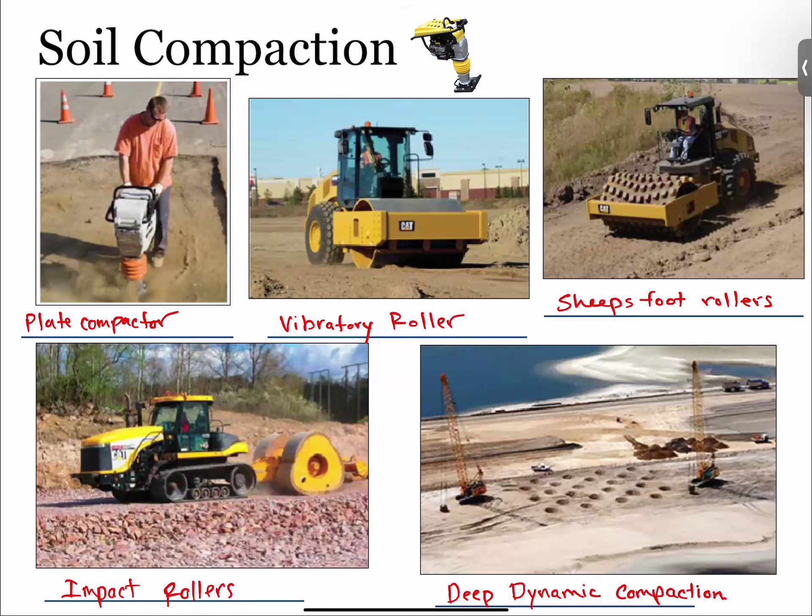So with the different types of soil, like gravel, sand, silt, clay, and domestic waste, all of these types of conditions are going to have different applications. So, for example, the static sheep's foot roller. Has anyone seen these before? Okay, we don't really see them too often in Florida. They're mainly used for clay. So they're going to be very good in clay soils. So if you drive up in Georgia, the DOTs up there are going to be running

these sheep's foot rollers. And the reason why is because, as we talked about with clay, with the SPT, clays are sensitive, like little structures of soil, right? And if we take a hammer and hit it, then it's going to just disperse it everywhere. So this sheep's foot roller kind of kneads the clay into densifying it, instead of having a smooth cylinder where the clay might stick to it, or an impact where it's just going to smush it around. So these are very good for clay.

This is also used a lot in domestic waste just because of the variability of material, like for landfills and different types of applications like that, as well as for silty soils. But it'd be kind of poor for gravel and sand.

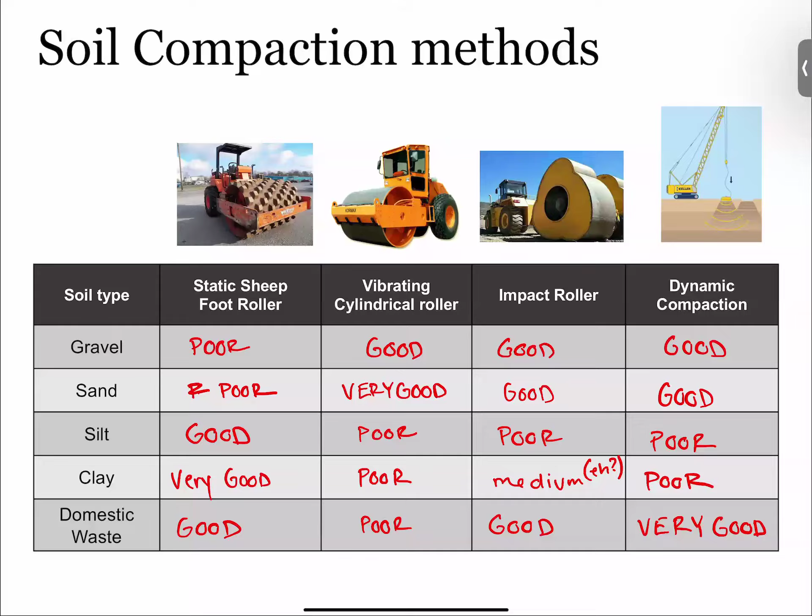So this is a really interesting technique that if you ever get a chance in your career to actually go and work on in person, it's really fun just to go to a job site to see them lift this 12-ton or 10-ton mass into the air and then drop it strategically, especially if they have multiple cranes going at once. But this is used on a lot of large-scale geotechnical problems where you need ground improvement to a certain depth. So mine tailings, any loose ground, old riverbeds that they're trying to develop on, and some dam work. And there are only a few specialty contractors, like Menard or Keller Group, that can usually do these deep dynamic compactions.

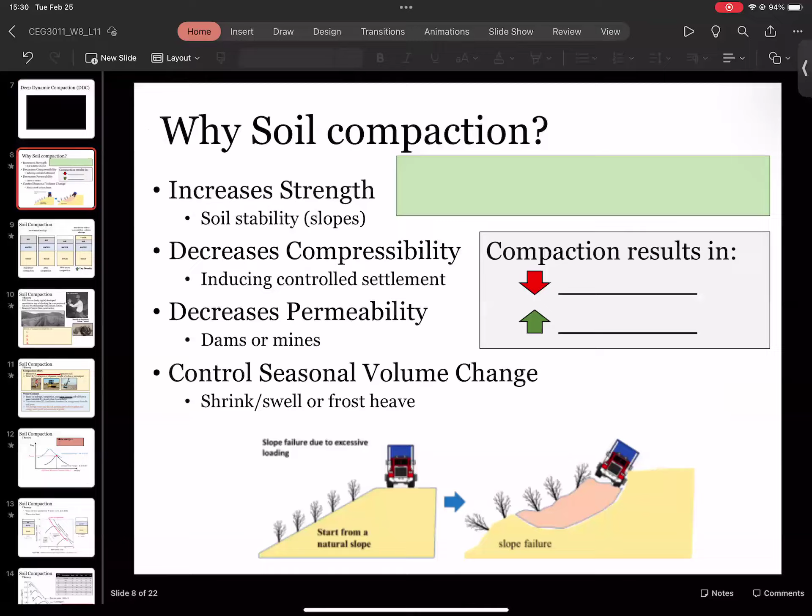It was working. As soon as I hit X, it'll probably load up again. Yeah, okay. Let's see if we can just play from here. Well, maybe this video is not going to work. All right, just close your eyes and imagine a sweet drone footage of going through a beautiful sunset and a bunch of weights falling and hitting the ground. That's it. I'll post the video.

It's not too crazy, but it talks about the whole process of deep dynamic compaction and some of its applications. So why do we compact soil? Overall, it increases the strength of our soil. What we'll learn, and the general theme of geotechnical engineering, is that granular soil will increase in strength as we increase density. As we add more material to our little cube, there's more frictional resistance and more particles locking together, which will increase the strength.

So this is really important for slope failure. We would compact very strategically on embankments like this, to ensure against shear failure on slopes.

It also will decrease compressibility, or essentially it accelerates any potential settlement by causing the settlement to occur on its own. There are a lot of cases where, if we know an issue will be an issue at the site in like 5 or 6 years or 10 years, they would induce that settlement ahead of time, before the project is complete and before it's connected to all the surrounding infrastructure, and compaction is a way of doing that. This will also decrease permeability. Just as a recap, permeability is the ease of water to flow through the pore space.

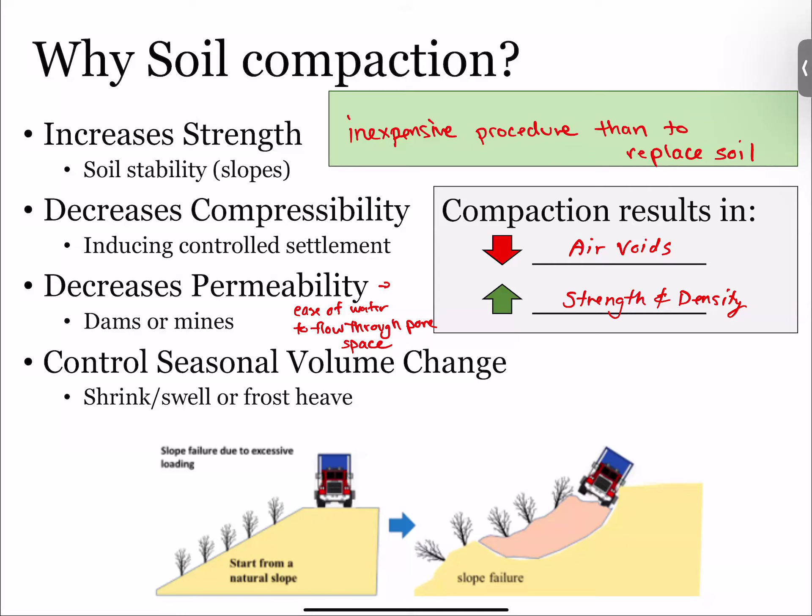So the general thing of soil compaction, what is happening? We have our beautiful phase diagrams. You remember that from a few weeks ago. We have solid, water, and air portions. We can only compact non-saturated soil, so we have to have air in it. If we compact saturated soil, then nothing is happening. We can't densify past 100% saturated soil. If you remember, there's that zero air void curve, that maximum density. So if we're already at saturated conditions, we can't compact any further. So this is for non-saturated soil.

But what we do is we remove the air voids by compacting it, or by rearranging the solid portion such that some of the air voids are removed. So we're removing the total volume. With each pass of more compaction, we're essentially removing the air voids, and then we replace those air voids with more solid material. That's why when you see the sheep's foot rollers or vibratory rollers at the job site, you'll usually see a dump truck nearby with soil fill, and a backhoe or a grader to come in, because you'll compact it and then put more soil in to meet that grade line.

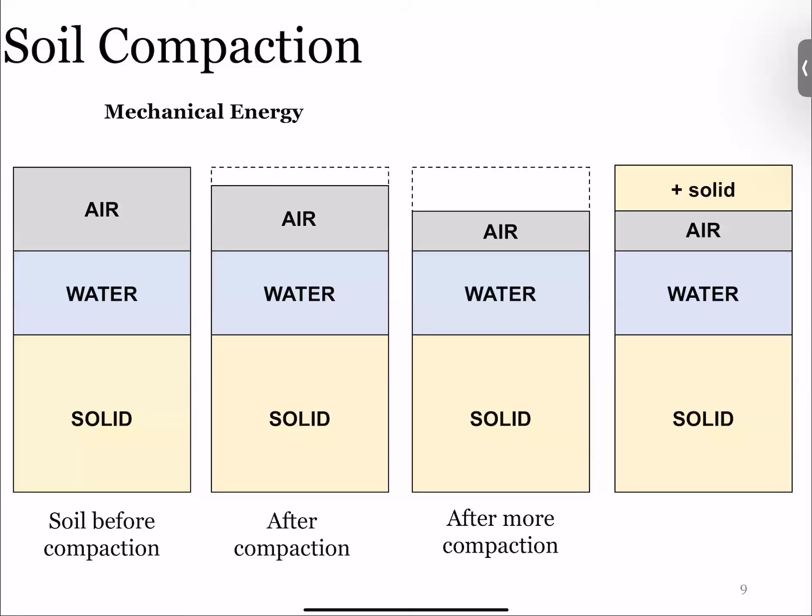You have a question? Can you compact something without using a compactor, by just using water? Wouldn't the water push out the air, and then it would evaporate and just get replaced by air? Isn't there a method where they just pile dirt on, like make huge mounds of dirt? Yeah, surcharging, that's a way of compacting clay that we'll talk about.

I've never seen it just like jetting water, if that's what you're talking about, or using static, like the dead weight of water to compact it. I don't know. I've never seen either case. I wouldn't think so, because the whole goal is to remove air.

So adding more water won't work, but you'll remove air, but you won't be removing the total volume. You know, removing the air will lower the total volume, which you can then replace with more solid material. If that makes sense. I don't know. I'll look into that. If I find something, I'll let you know. Maybe like a pressure washer.

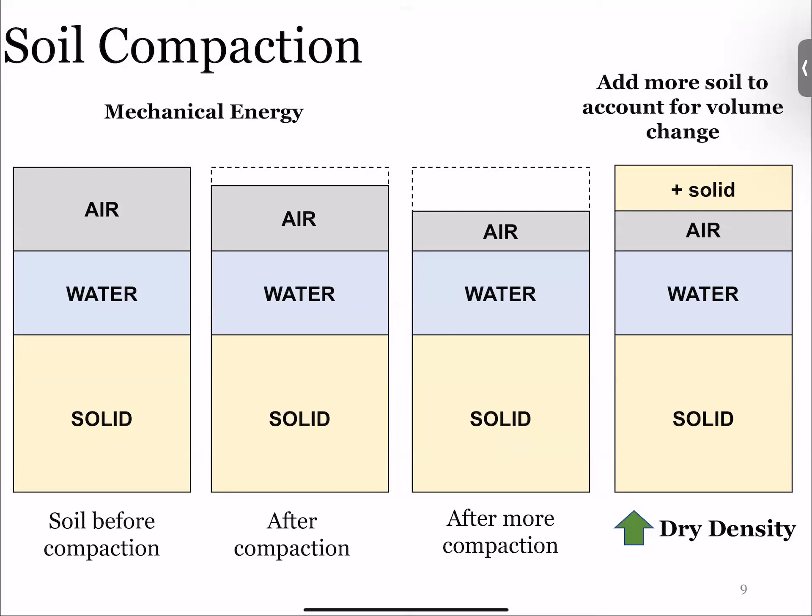So anyways, that's how this increases here. We're increasing our dry density, we're increasing our mass for the set volume. The whole soil compaction theory is kind of interesting if anyone's interested in the history side of it. It really spawned out of the 1920s, 30s in California, when they started having to build all these really large earth dams and reservoirs for the drinking system in the agricultural areas, right on the other side of the Sierra Nevada areas.

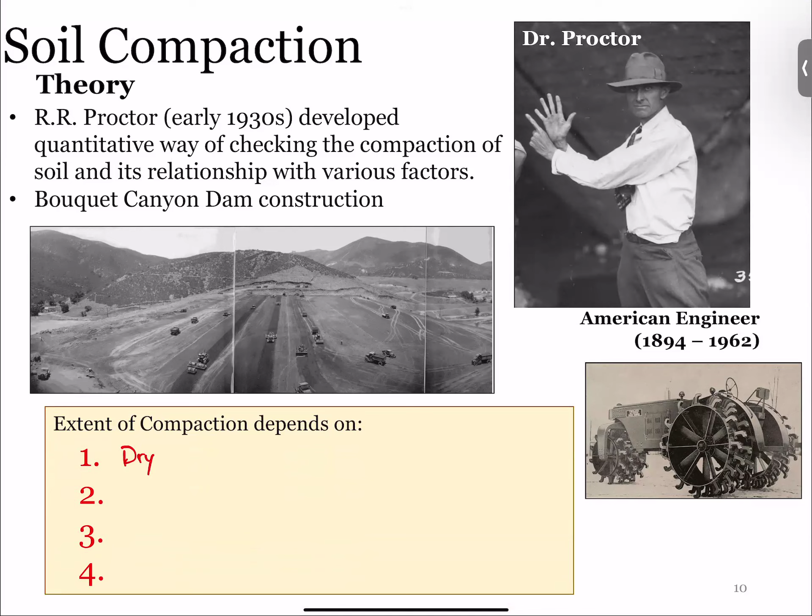It was first applied for the Bouquet Canyon Dam, which I think is still out there in central California. But essentially he realized that the extent of compaction can depend on four things. So it depends on the dry unit weight, which is our gamma dry. It depends on the energy, or the compaction effort is what it's called.

So this would be like the type of machine that we are able to apply to it, how much energy we can physically apply to it. It depends on the soil type and the gradation. And then of course, the big thing is the water content. Now, did you guys do the Proctor hammer test in CE materials?

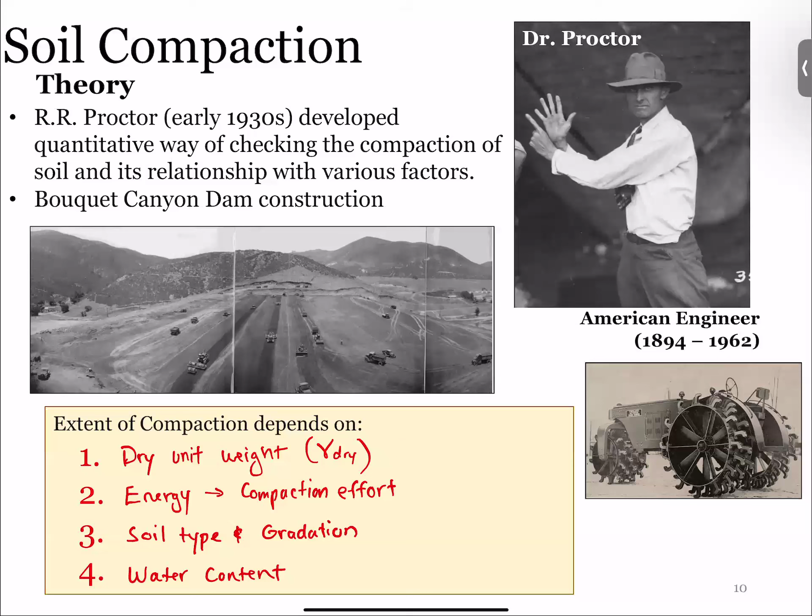Okay, yeah. So this is where he was named after, or it was named after this Proctor hammer. And that's what you guys should have been able to see out of that lab: we look at the dry unit weight relationship with the moisture content, but then also how that relationship changes with the energy applied and changes with the soil type or the gradation type. So the whole theory is that we can apply this compaction effort, which is the measure of mechanical energy. And it's something that we can calculate in terms of joules or whatever we measure energy in.

And the benefit of that, as you remember back from the lab, is we can apply this same energy to our soil in the lab as we are applying in the field, because we normalize it by the volume we're applying. So in the field, this is a function of the number of layers, the number of passes, the weight of the roller, or the technique. There are all these handbooks and guidelines that Caterpillar will produce, or whoever's doing the deep dynamic compaction, where you can get a quantifiable number of how we can change the amount of energy in the field applied to our soil.

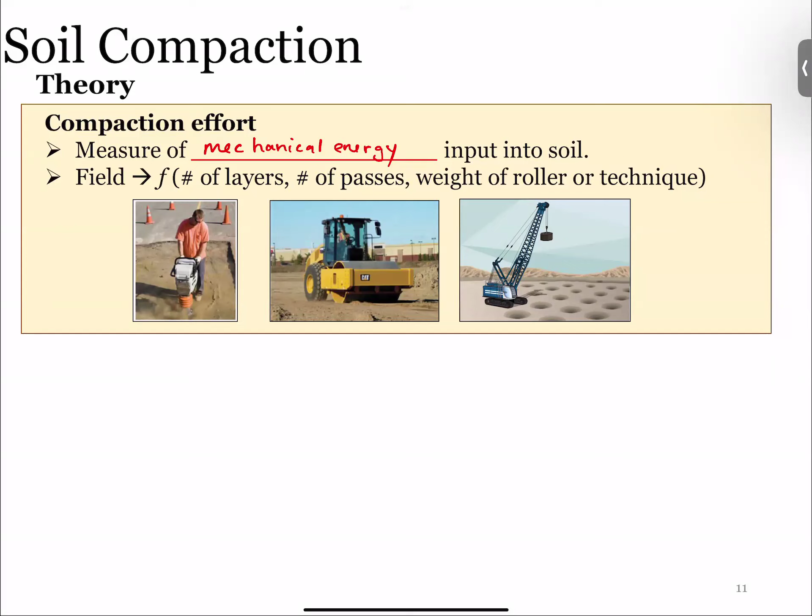And for the water content side of things, this is where the soil type comes into play a lot, because how the soil retains water is going to be dependent on the grain type. So we already talked about how clay retains water more than gravel does and more than sand does. So with the water content, you have this sweet spot or Goldilocks zone, where if we have too much water in our soil, then the water is going to transfer the energy away from the soil grain. That's the whole thing I was saying before, where water has a Poisson's ratio of 0.5, which means no volume change. So think of a water balloon that's tied.

You push it on one side, it's just going to expand in the other direction, right? So even though you see deformation, there's no total volume change. You're not losing any volume. So if that's the case, then when you apply this energy, it's just going to shove all the other sand particles or gravel particles out of the way. It's not going to rearrange them into a denser structure that will then increase the density. Now, if we don't have enough water, then the friction will actually overcome and it'll be difficult to apply energy, and it won't result in the movement of the actual grains.

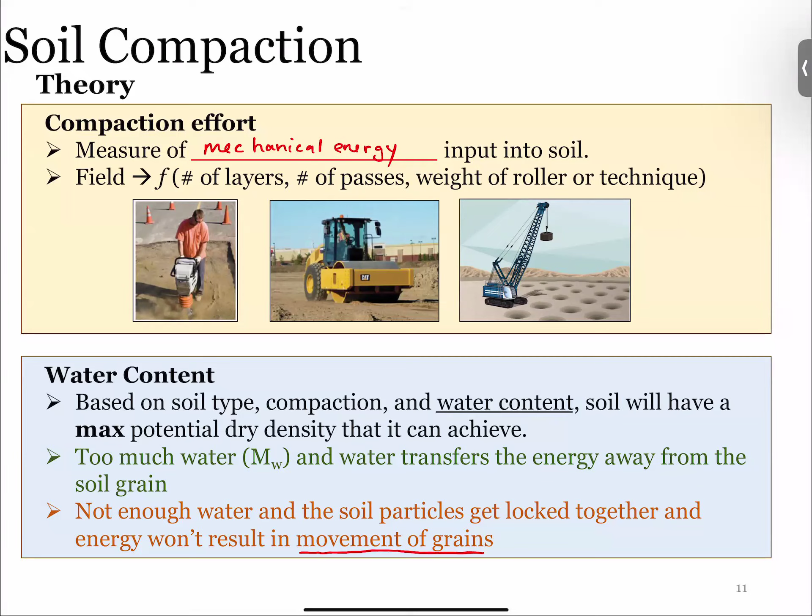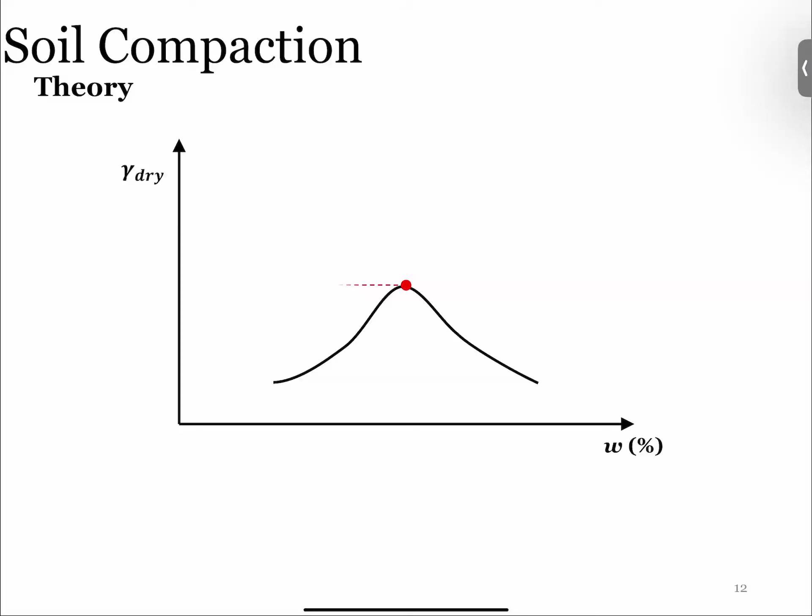So in the lab, we do this theory here where we show the range of moisture content on the x-axis, and then the corresponding dry unit weight. And the dry unit weight is our compaction, because this is our density. So here we can see this relationship for this, what we call compaction curve. And here at this point, this is called our optimum moisture content, or the Goldilocks moisture content, where this is the moisture content that will produce the highest density.

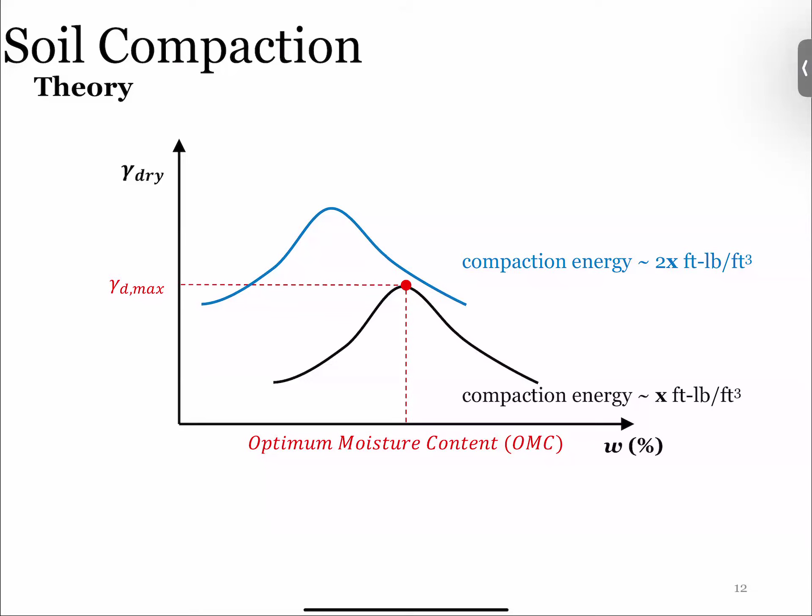Now, this is just for one type of compaction energy. And so let's say we use a beefier machine or a bigger machine, which would produce, let's say, 2 times the amount of energy applied. What will happen is that curve will shift up and to the left. And I want you to think about that physically. Hopefully that makes sense. What we're saying is with more energy, we can apply a higher density, which makes sense. And we can apply that higher density at less of a moisture content. Because remember, the moisture is there to allow the particles to roll over, essentially lubricating the particles. So if we're applying more energy, we need less water because those particles are going to move regardless. So it's going to shift up to the left,

and if we have more energy, then we see a higher density, and we see a lower optimum moisture content. So when it comes to why don't we just use the most amount of compaction energy, and we can achieve the highest density in the field? Of course, with this shift of line comes more work hours or more expensive equipment or whatever. So it's always this optimization.

Maybe you don't need to achieve a super, super high energy. Or maybe in some cases, it's not the energy, or it's not the dry unit weight that's the limiting factor, it's the moisture content. Maybe you're working in Arizona where you just can't work with, you know, you take the spray water trucks out and it just evaporates right away. So maybe you have to adapt your energy to account for the fact that your moisture contents are going to be in a lower range anyways. So it's this kind of 3 variable system that you have to optimize depending on your site conditions, or depending on your requirements for the project that you're constructing.

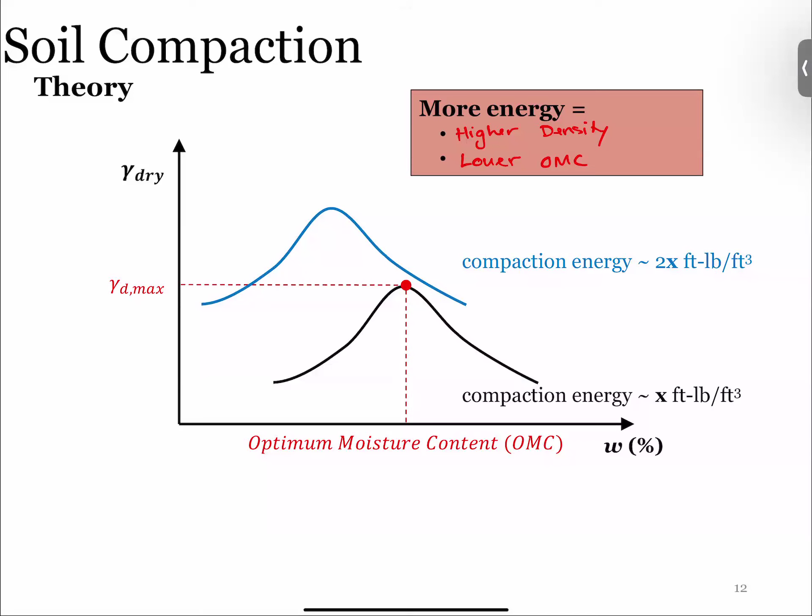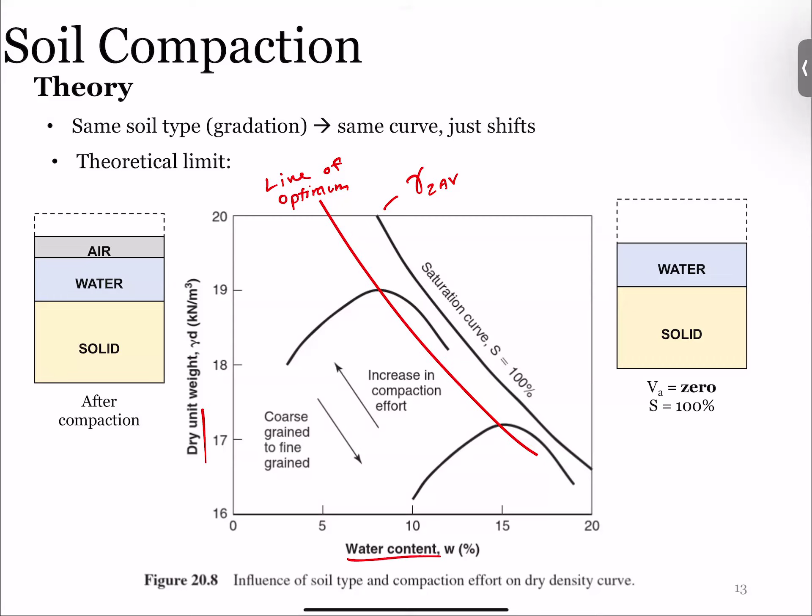Right? So usually what we'll see is that there's this curve. If we're using the same type of soil and we're only changing the energy, we'll see this line of optimum moisture content, or just line of optimum. I don't know how to spell optimum. Whatever, I think that's close enough. But you have this line, it's almost like a function that is just going to tell us how, as we change energy, we see the dry unit weight and the moisture content change. So let's remember, this is for same soil or same gradation.

So this is a chart that shows how the soil type will change the optimum moisture curve. And so these are 8 different soil types. Your 1 and your 2 and your 3s, these are the sandy soils. And then your 4, 5, 6, and 7, these are our more clay or fine grained soils. So what do you notice as we go from well-graded sandy soils here to clay soils? What do you notice about the shape, not the location on the chart, but the shape?

Yeah, essentially it's less sawtoothy, right? It mellows out the curve a little bit, which could be a little difficult because it's harder to identify that line of optimum. So for well-graded soil, or soil that has a good mixture of densities, then we see these sharper patterns. So it's easier to discern those high points.

And you can see down here at the very bottom, SP, poorly graded sand, this is one of the flattest ones. Poorly graded means the material is basically all the same size, not a well-distributed range of particles. So, I mean, you have a bunch of ping pong balls, you're going to apply energy to it, you're going to rearrange them, but it's not going to change the density much, you know? So the whole compaction process is applying it.

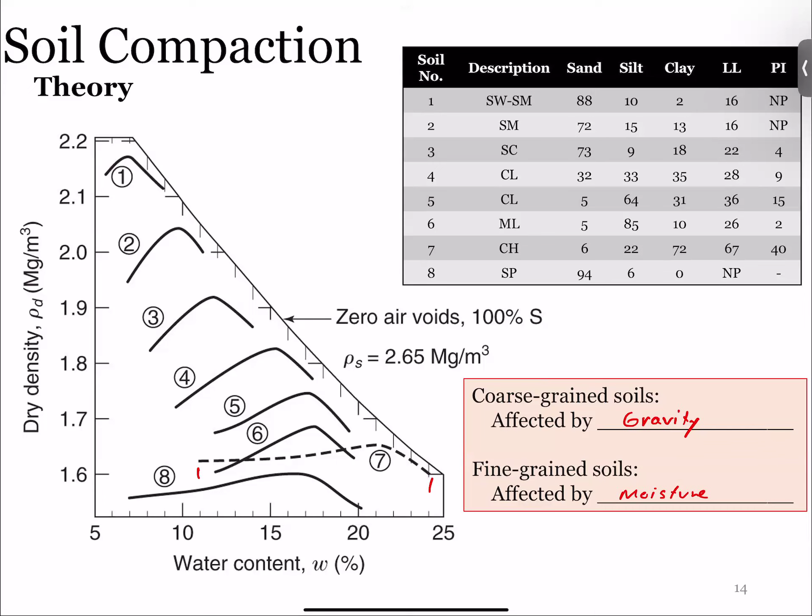All right, so let's talk a little bit about the standard Proctor compaction test, and sounds like you guys did this already, so hopefully this is just a refresh, most of it. The whole goal is this was developed to simulate compaction in the lab. So instead of having trial and error out in the field and mobilizing the contractors and the equipment, we can apply that same energy that we need out in the field in our nice climate controlled laboratory where we're paying an intern $20 an hour to do it instead of millions of dollars out in the field. So it's a lot better for the wallet that this exists. We save a lot of money.

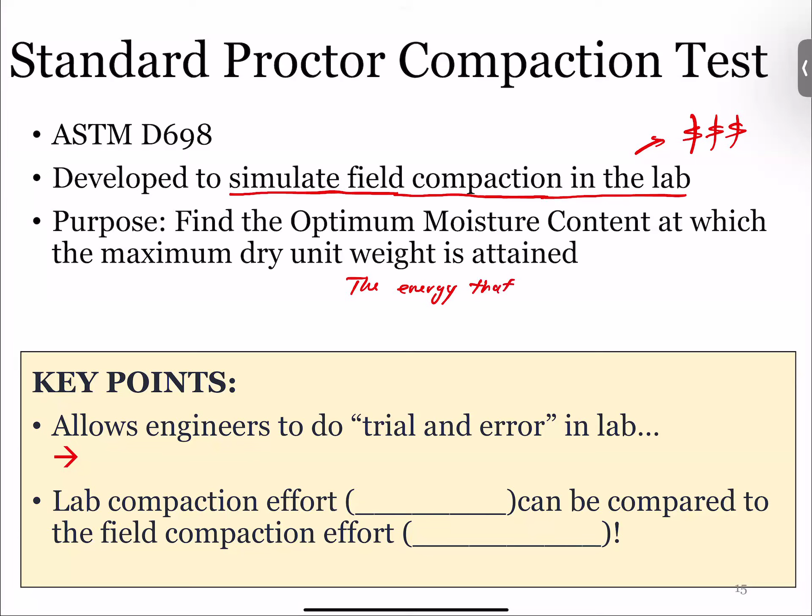So the whole purpose of this is to find the optimum moisture content at which the maximum dry unit weight is attained, but specifically for the energy that is needed in the field. This also allows us to answer the question, like, can we achieve this with the material and the equipment we have in the field? Like, can we even get this moisture content?

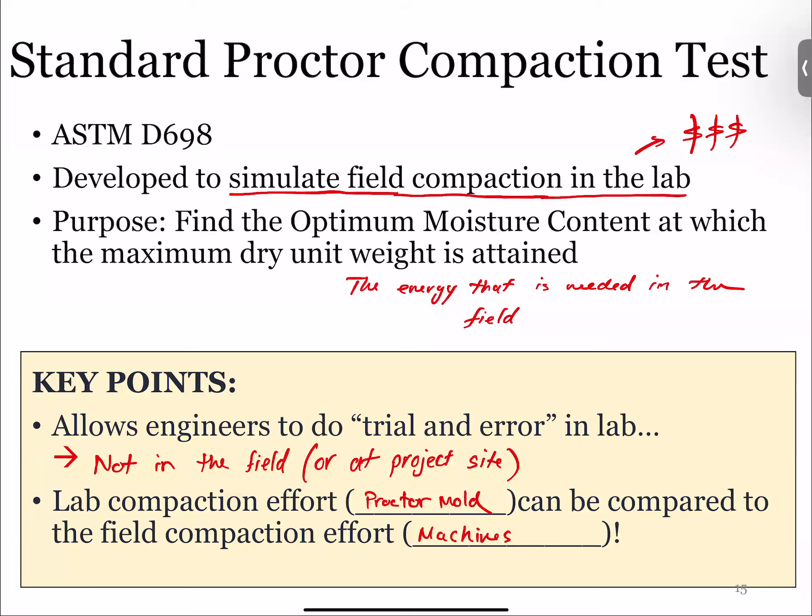We normalize it based off of volume here in the lab, which allows us to then scale it to our field. And you get the Caterpillar handbook and you see what exactly you need, what type of dozer, what type of machine you need to actually apply this energy to our site. So the standard Proctor compaction test looks like this, except it's from 2025, not 1990.

But it's this giant steel bucket, the hammer, this is the standard Proctor hammer, so we also have the modified now to apply a little bit more energy. It's 5.5 pounds and it drops 12 inches, lift it up, drop it. This is the manual version, there are automatic ones too, but we make the students manual just for the build's character. And the whole thing is we can find the density from the mold by knowing the mass of the mold, right? The weight of the mold. The volume of the mold, we know, we can find that here.

Then we use our oven to find the moisture content of the soil. And then once we find that, we can find our dry density, because this is going to be our moist density, technically. We can find our dry density by using this equation that we all love. We always show things in dry density because moisture content is going to change throughout the project, summer, all that stuff. So even though we use moisture content in the moment, like for compaction, we know it could be changing the next day or next week.

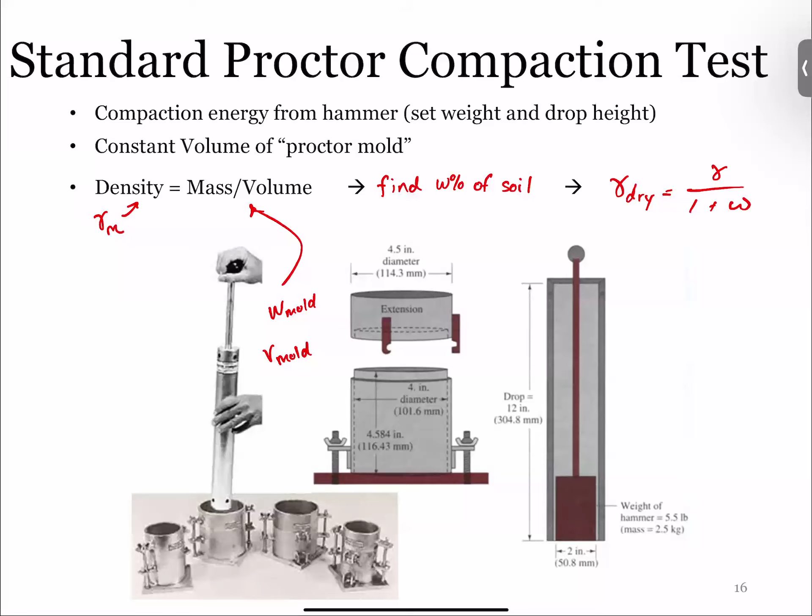So the general steps of this: we take the masses of all our materials and all our Proctor molds, fill a mold with a material at a set moisture state, and then compact it using a standard method. So a certain number of drops from a certain height. That's all just to ensure that we're applying the same amount of energy each time. And we do different trials, finding different moisture contents. Then when we calculate the dry unit weight, we can plot it and find the optimal moisture content versus the dry unit weight.

Not 100% sure, but I think this is Dr. Crowley when he was in high school. I always think that. Don't quote me on that. I can't be 100% sure.

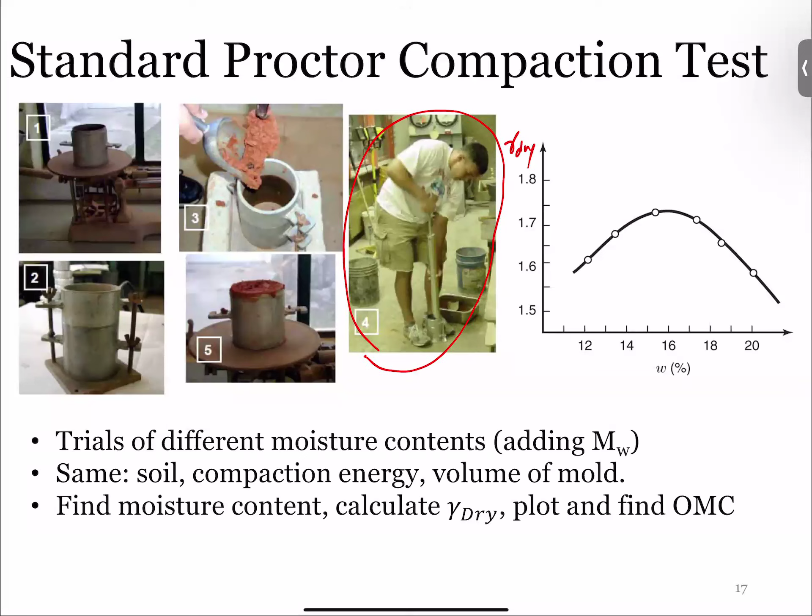So when we plot this, the whole thing is that this line of optimum is related to a function that relates the moisture content, the energy, and the maximum density that we can achieve. And the whole reason why we would do this is, again, these are the variables that we can control or that we need to find in the field. That's the benefit of producing this line of optimum.

So in our class, what we do in the lab is just one moisture curve, right? But if we were to do that whole thing again with 25 blows per layer, then 30 blows per layer, 50 blows per layer, we'd be able to produce this line of optimum. And by calculating all of these, you essentially get a three-dimensional relationship. So obviously you have moisture content versus dry unit weight, but imagine another axis coming out here where now we have energy. And so we can find any of these based off of the two that we have. So if moisture content is a limitation, but we can use whatever energy and density is whatever we need it to be, then we can calculate the moisture content that would achieve those two things.

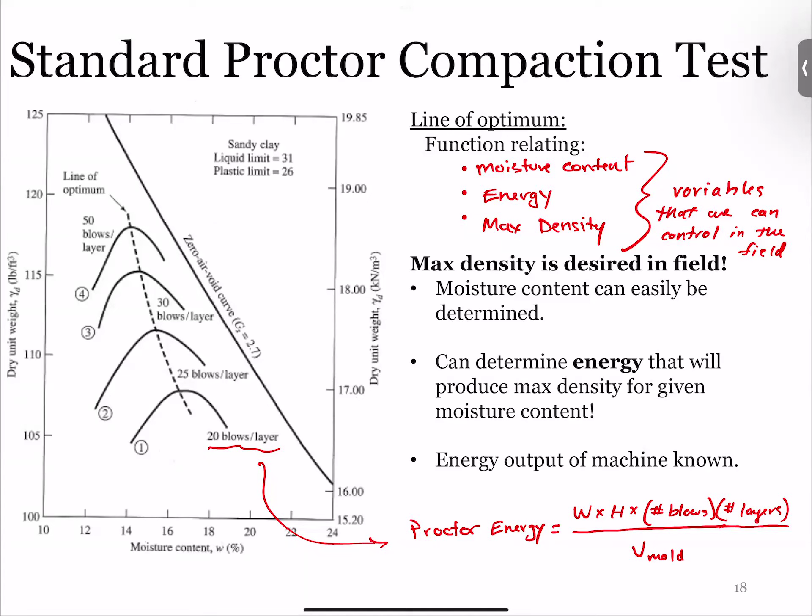So we start off in the lab. We determine our optimal moisture content. We call the contractor in the field and they say, okay, we need moisture content at this amount. We need to use this energy, and that should achieve this amount of density. That's nice on paper, but of course we still need to check the density when we get out to the field. So even though the theory is all there, we still need to make sure that we're doing correct quality control or engineering inspection for this.

So there are different ways to determine the field density, and we're going to go over one of them in the lab section of this class. The most common one, which I'm going to put first, is the nuclear gauge method. This is a portable device. It looks like one of those spot cleaner vacuum things that you buy at Publix, those scrub-it things. It's very heavy. What it does is you go to the site or the compacted area and drill a little tiny hole in there.

It has a probe that emits some nuclear radiation, a small amount of some type of isotope, which the chemists would know. I should probably know it. But it can correlate the signal of the radiation reflecting back to the sensor, and if you know the moisture content, then you can calculate the density from that. It gives you a spot check right away. So it's really beneficial because it's very quick, you can just move, and the device takes the measurement right away. Since it does have the word nuclear in it, and it does use a heavy metal isotope, even if it's not crazy harmful.

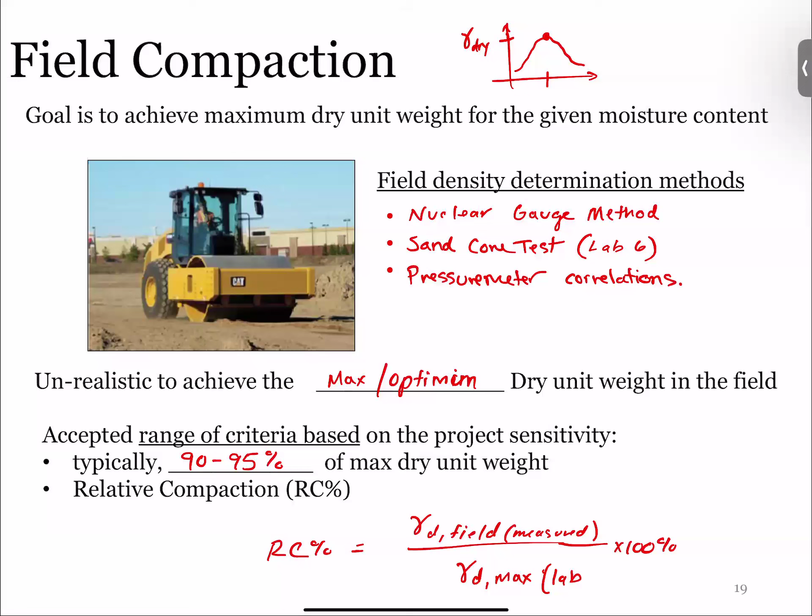So graphically, it would look like this. This is a little example here. So let's say our optimum moisture content is at 16%, and we're at 1.74 megagrams per cubic meter. That's our dry density. So that's right here. This is our peak. And we tell our contractor friend, okay, we need this at 1.74 megagrams per cubic meter. They're going to laugh at us. They're going to say, no, give me a range. And so we would say, all right, let's say the acceptable range for this is 95%. So really what we would look for is, as long as our dry density is greater than 1.65 megagrams per cubic meter, then we're within that accepted criteria. So that would be this range here.

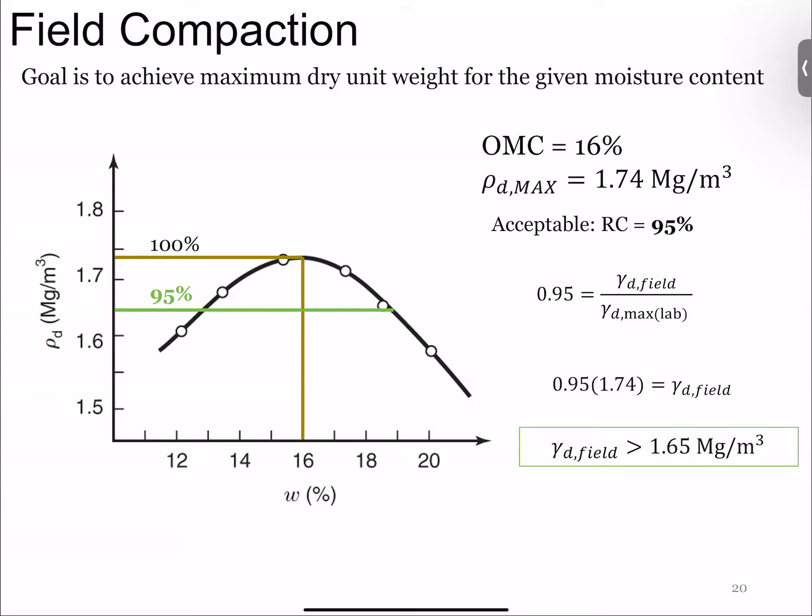So then the question would be, okay, anywhere here, it could be at this moisture content, but also maybe we want to go on the other side and have a more wet condition here. So this is where we can have this range of moisture contents on either side of our optimum moisture content to apply.

But we would have what's considered wet of optimum and then dry of optimum. So there's two kinds of cases that we can get, even if we have the same density. And that's just the way density works here with the bell curve of it. So even though our optimum moisture content is 16, the range of it, whether we're wet of optimum or dry of optimum, will make a difference on the total amount. Does anyone want to guess which one is better?

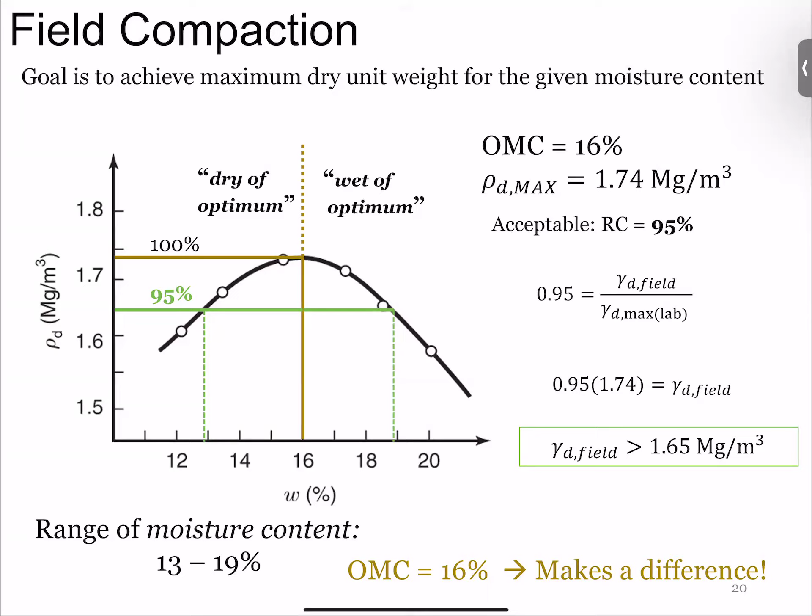Wet of optimum? Who thinks dry of optimum is better? The answer is neither. It all depends. That's the answer for all of engineering. It's always "it depends." Really though, it's always it depends. And I'll show you here too.

Because remember what we said, the things you can control: permeability, compressibility, and strength. Some projects you would want to control permeability over strength. Or some projects you want to control compressibility or how much it's going to settle over strength. That's what makes geotechnical engineering foundation design so interesting, is that you have to first determine what is going to be the controllable issue or what is going to be the weakest link of your project, and which is going to fail first. And that's the thing you have to design according to. And that's going to change based off of the geologic conditions and all of that too.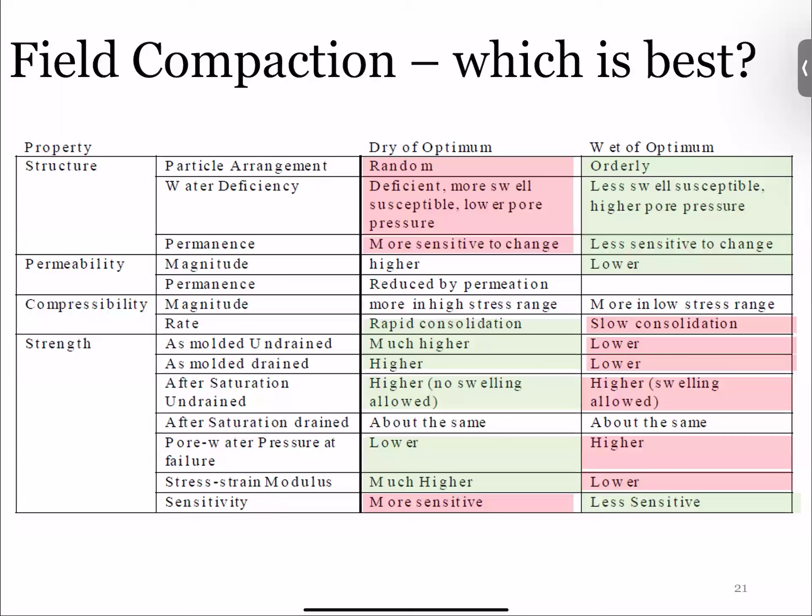So was this recap for the most part or brand new stuff? Brand new? Sure. Well, I'm glad we talked about it then, because I wasn't sure if he covered it. I wasn't going to talk about it at first, but anyways, we'll illustrate this a little bit more in lab 6. I know that's a few weeks from now for the sand cone test.

But that's all I wanted to cover on compaction, at least from a theoretical standpoint. And once we go over the optimum moisture content stuff, then you will need to know how to find the optimum moisture content and calculate that on your exam too, from your lab stuff. So make sure you know the concepts of the application of each compaction device, where it's beneficial, and also the optimum moisture content, how to find that. But that's it for that.

Look at that, we're finished. I didn't talk to Megan yet. You don't want to stay